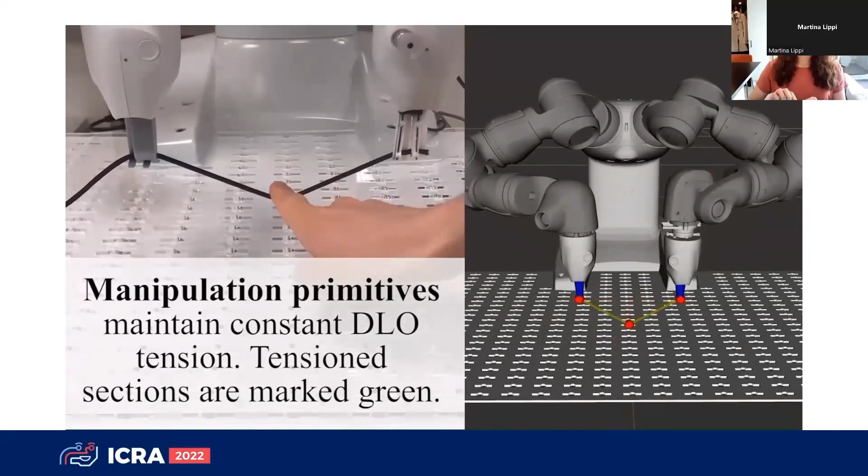The most important primitives are naturally the tensioning ones. Here we demonstrate in more detail how the sag is constantly estimated, shown in red when we have too high sag, and in green when sag is none, meaning we can assume a linear edge. We also show a demonstration of all of the primitives on the real robot.

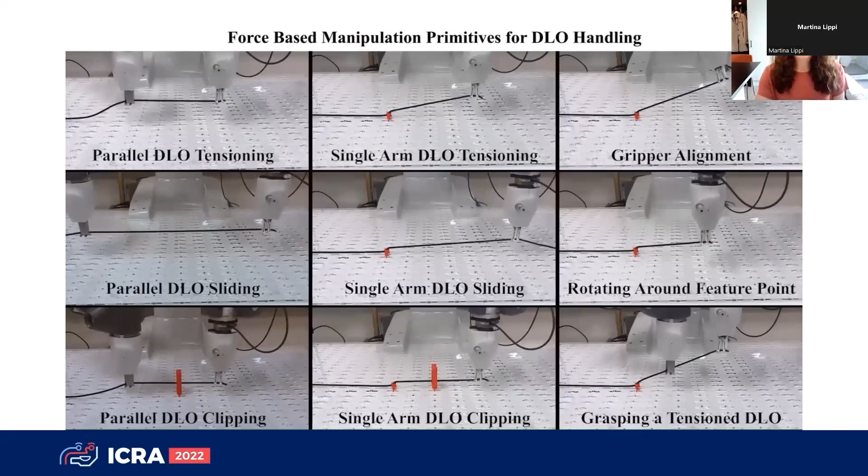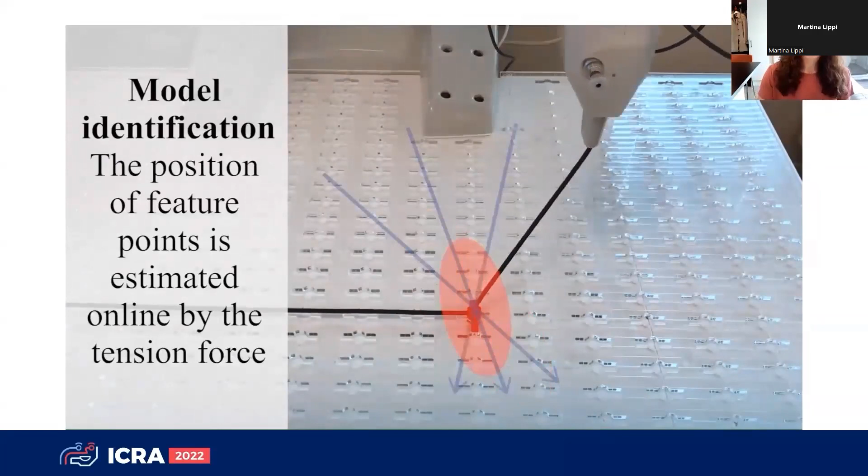And then finally, we test all of this on a cable harness experiment with hard-coded primitives, which are shown here at the bottom.

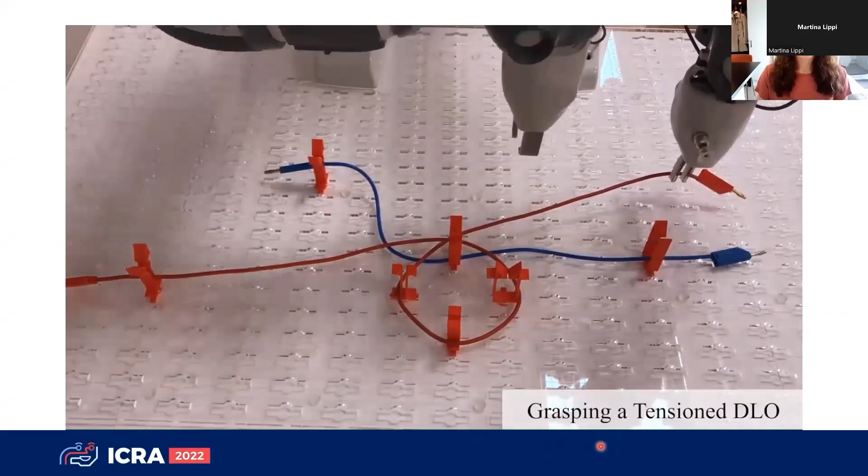Any questions? Thank you, Rita. Yeah, actually, before questions, I just want to mention, I hope the last frame would stop there because I had to shorten the video, but a lot of the credit goes to Finn. That was the last second frame that was there. Finn did this work in his master thesis, so it was really good work. Okay, nice.

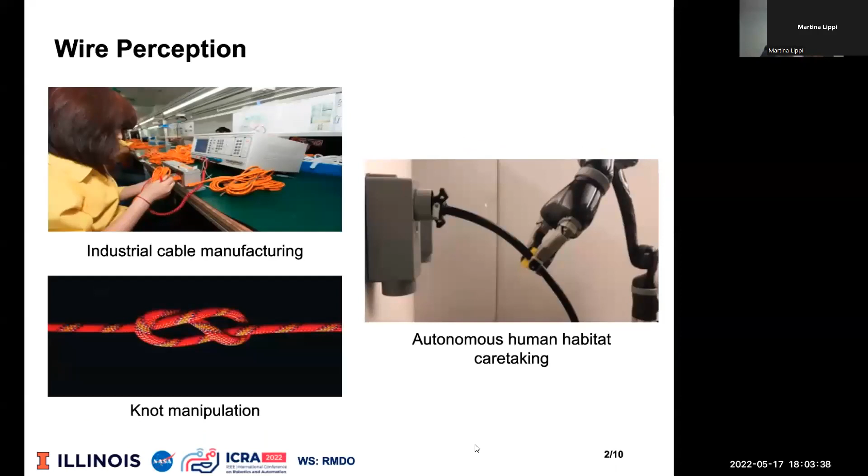Wires are ubiquitous deformable objects. Perceiving these objects enables robots to interact with them in challenging manipulation scenarios, like industrial wire assembly, knot untying, and autonomous human habitat caretaking. Our work on wire point cloud instance segmentation from RGBD imagery is inspired by several recent works. First, recent work automatically generates a synthetic dataset comprising single wire images where the wire masks are cheaply obtained using color-based thresholding. These images are used to train DeepLab v3+, a method of semantic segmentation to segment wires in cluttered scenes. Second, the Ariadne+ algorithm proposes the first method of RGB wire instance segmentation, enabling individual wires to be distinguished from each other, building off work produced in the auto-generated wires dataset. Third, MaskRCNN is a state-of-the-art general method for object instance segmentation in RGB images, learning to directly predict instance masks. Finally, the PointRend mask prediction head is trained to iteratively predict the label for ambiguous points to refine the mask edges to finer resolutions.

Point-wise semantic labeling of point cloud data remains an open challenge in computer vision. We first perform instance segmentation on RGB imagery, then apply the instance mask to the depth image. Object instance segmentation models require labeled data for training. Annotating point cloud data with object instance information is expensive. Pixel data in RGB images can be cheaply obtained using automatic labeling techniques. In general, point data in depth imagery are more difficult to label to obtain ground truth information than pixel data in RGB imagery. This work leverages automatic RGB image labeling in the UIUC wires dataset to train MaskRCNN to perform object instance segmentation on RGB imagery.

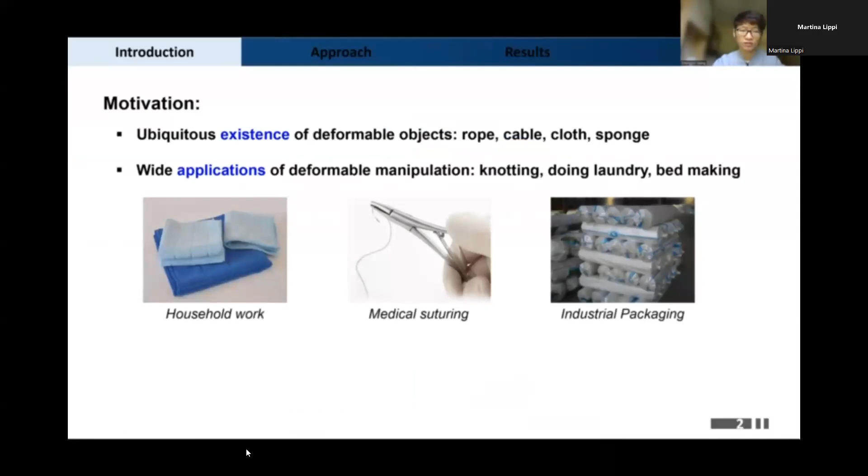Deformable objects are everywhere in our daily life and have a wide range of applications, from housekeeping, medical operation to industrial production. Compared to rigid objects, deformable objects pose two main challenges: high-dimensional configuration space and complex dynamics, which make both planning and learning time-consuming.

To simplify the deformable manipulation problem, we have conducted research trying to fill several existing gaps. Instead of defining key features manually, such as corners and contours, we want to establish an automatic feature extraction method that is adaptive to different goals. Instead of using expensive fine models, we want to find a simpler model with acceptable accuracy. Instead of learning high-dimensional space, we want to find a compact state representation that captures the most important and relevant information to achieve the task.

This leads to the work we are doing now, namely goal conditional model simplification for deformable object manipulation. Potential usage of the method includes simplifying the action space or state space for both motion planning and policy learning. In this work, we focused on action space simplification for manipulating ropes and clothes using the cross-entropy method as a planning algorithm.

Given the goal configuration, our model simplification method will find the minimum elements to approximate the original model with acceptable accuracy. Depending on the type of deformable object, line fitting or mesh simplification will be called. After model simplification, a set of key points will be extracted as graspable points, which can reduce the searching space for CEM-based motion planning.

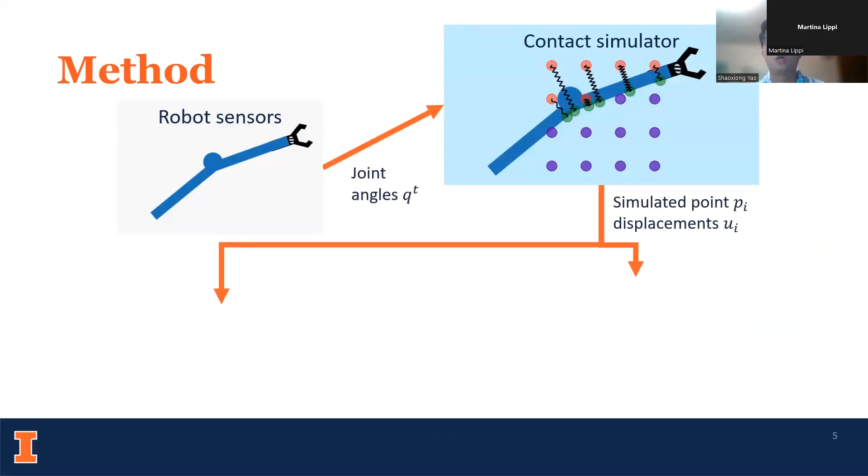Our method is as follows. First, the hardware sensors will sense the joint angles of the robot arm. Together with the geometry of the robot, the contact simulator will simulate quasi-static stick-on-stick motion during interaction. The simulated displacements of points in the field will be sent into the volumetric stiffness field, giving expected joint torque measurements. Compared to the actual joint torque measurement, the recursive estimator will update the belief on the distribution of the stiffness in the environment. We implement an extended Kalman filter-based method that can run this update loop at 17 Hz on a normal CPU.

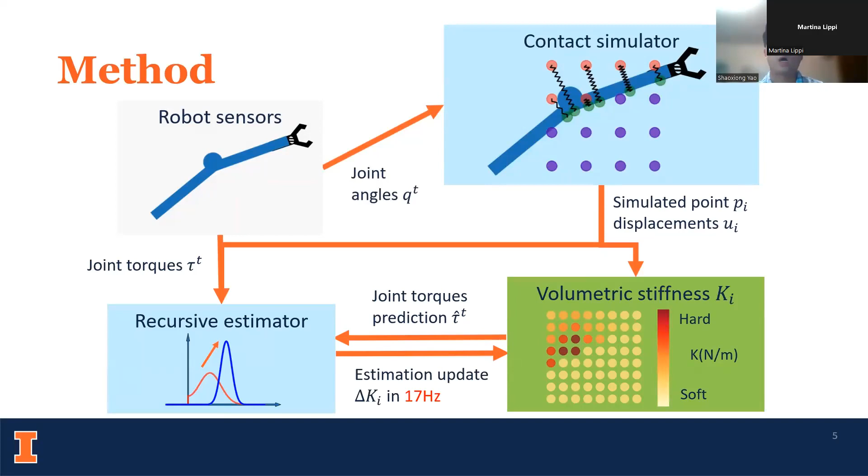We repeatedly touch the same location on the plant from different joint angles. Here we can see two features. First, before contact happens, the free space volume is mostly estimated with low stiffness and are not visualized. There is sparse spurious estimation, but can be potentially removed in post-processing. Second, when contact happens, the estimated high stiffness region is mostly localized around the true contact position between the robot arm and the artificial plant.

We make quantitative evaluation of this dataset with 11 touch sequences and 400 steps for each sequence. We take a k-fold validation approach, where we take every sequence as a testing sequence and estimate the volumetric stiffness field using the rest 10 sequences.

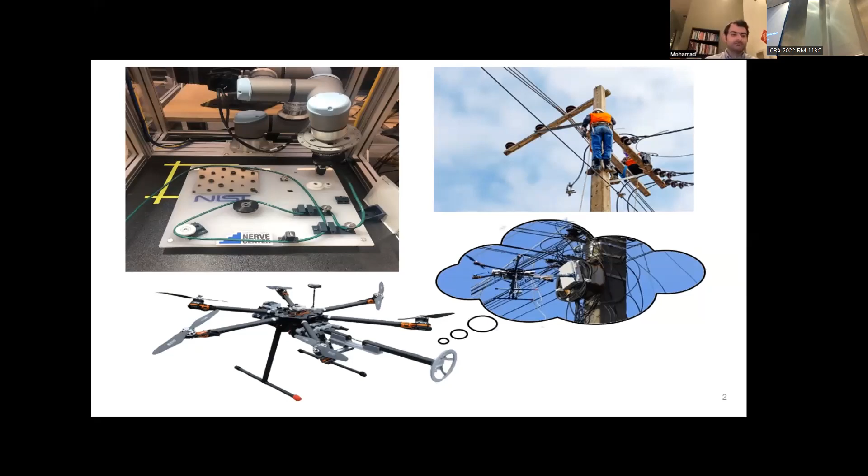On the other hand, to extend the DLO applications to aerial robots, we need to study the requirements for physical interaction of aerial manipulators with DLOs. Some of the challenges in this application that a detection method needs to address include partial views and occlusions, crossings, existence of multiple DLOs in the frame, and supporting different image types.

Finally, the detection method needs to output a model that is suitable for other automation tasks, such as manipulation and planning. While there are many methods for segmentation of DLOs, their output as a collection of pixels is not suitable for most robotic tasks. On the other hand, various tracking methods for DLOs exist that can track the motion of a DLO across the camera frame once it is initialized in the first frame.

However, as far as we know, our detection method is one of the few solutions that can fill the gap between the segmentation and tracking methods for robotics purposes.

To go through our approach, first, the method segments the input frame. This output has many gaps which need to be filled and many crossings that need to be resolved before it can be used. In addition, the segmentation is purely a collection of image points, and we need to model the DLO in a more suitable way.

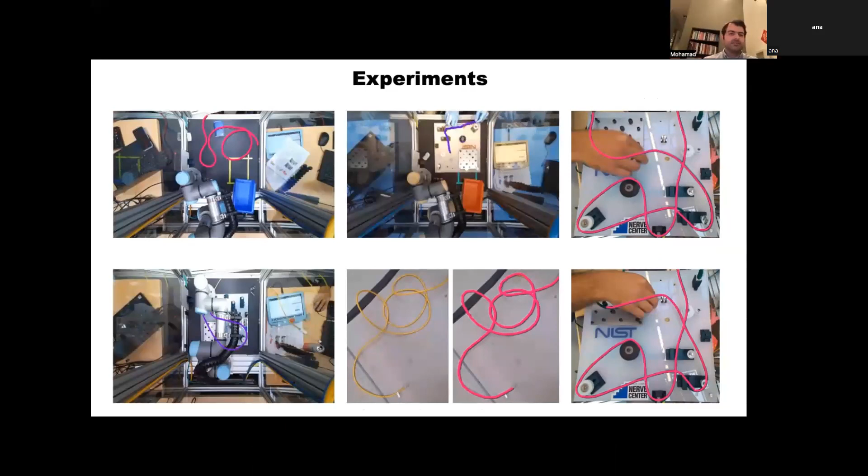In these experiments, you can see how the detection method can handle occlusions and crossings.

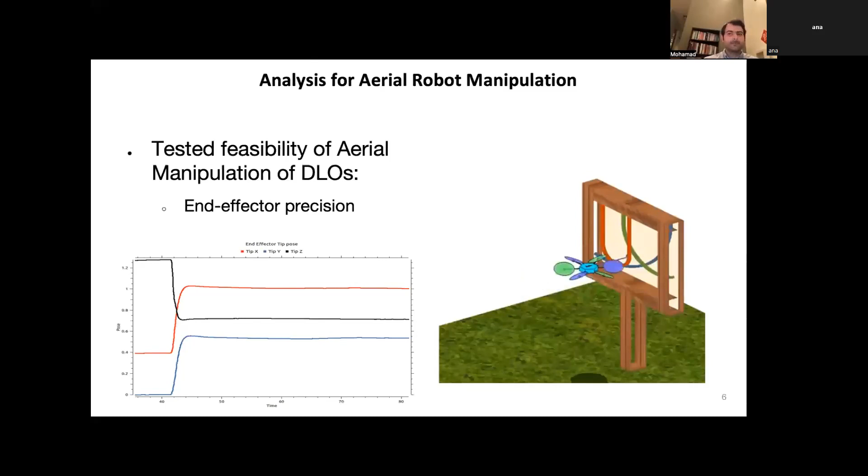To extend the physical interaction of DLOs to aerial robots, we analyze the feasibility of the tasks from the end effector position perspective in simulation. We also analyzed the required forces for normal everyday manipulation tasks, such as pulling a USB cable, and concluded that even for simpler tasks such as this, the remaining wrenches to perform the tasks are barely enough.

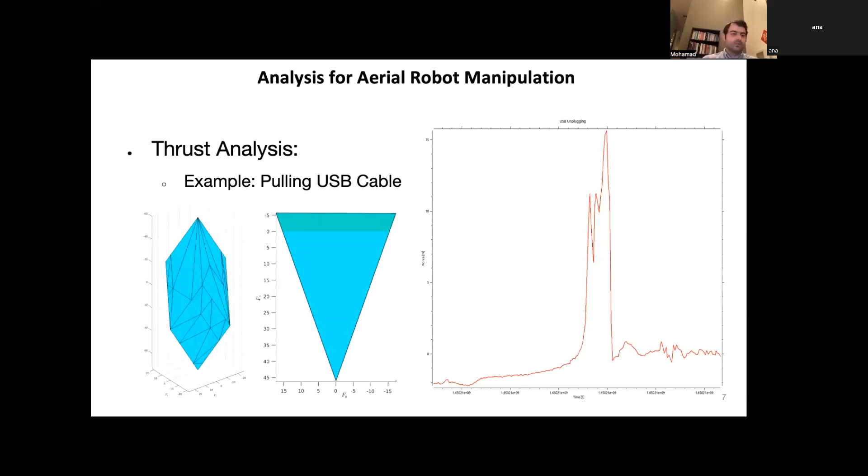With that, I'm going to conclude this talk, and thank you for listening.

You have a question? Yeah, just come here to the microphone. Okay, thanks a lot. Any other questions? Thanks for the great talk.

I was wondering, how did you reason about which cable is on top of the other? Because in cable manipulation, if you do not reason about that, it might bring about a bunch of problems, right?

Yes. So in this specific work, we did not reason about it. We did develop some method, and I've seen actually better methods being developed than what I just ad hoc developed. Maybe in future work, it will be infused into this method. But right now, it does not detect which one is on top.

Would having a side view help? Probably having a side view helps, but the methods that I've reviewed—I cannot disclose what methods they are—had a 99.5% success rate in detecting the top one. So I'm pretty sure it will be published.

Cool, thank you. Thank you. I think we also have a question here in Zoom. So there is Dogar. We cannot hear you. Maybe you could just write in the chat.

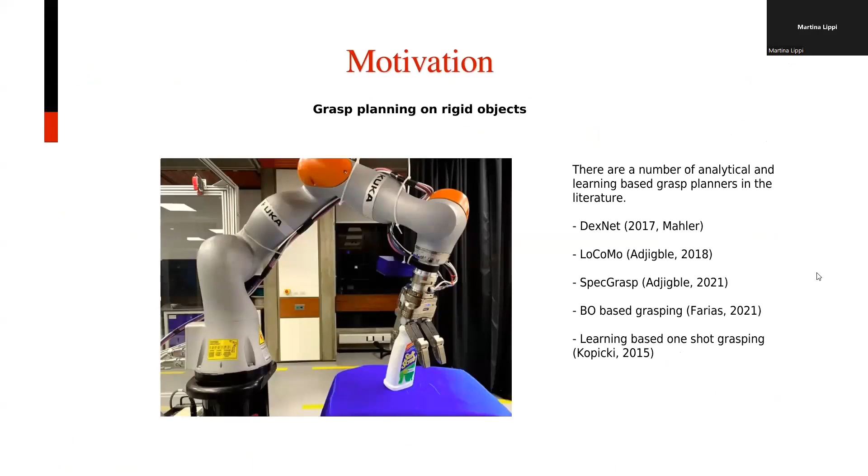In grasp planning literature, there are a number of methods to plan grasps for rigid objects. But what about objects that have suffered some non-rigid deformation? Intuitively, we might just think that we can ignore the object before the deformation and plan grasps directly on it after the deformation has happened. However, this can be counterproductive, as we're ignoring some previous or expert knowledge, such as task awareness, and it can be inefficient because maybe we have planned grasps before the deformation happened and we're just throwing them away and planning them again afterward.

As humans, we're capable of recognizing similar objects and similarities between objects, and we can find correspondences between different parts of a shape, even in the presence of deformation. Thinking of that, we can consider a second option: transferring grasps between instances of objects that have suffered non-rigid deformation, exploiting correspondences between parts of the objects.

There's a very nice framework proposed in the 2012 paper 'Functional Maps: A Flexible Representation of Maps Between Shapes,' which can find correspondences between near isometric shapes, even in the presence of large deformations. By joining that together with some user input to have task awareness, we have our method.